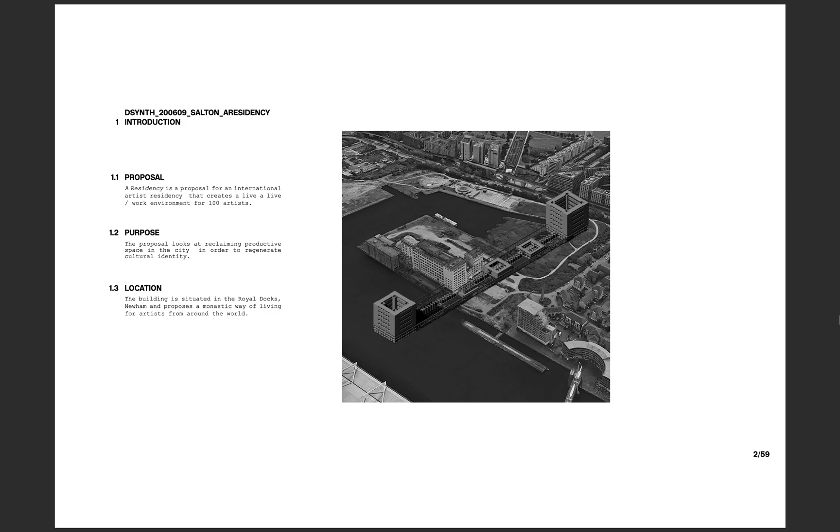This project is titled A Residency, and it proposes a new international artist residency to counteract the failing cultural climate amidst the placeless residential developments of East London. In the post-Brexit landscape, the UK government is prioritising STEM immigrant professionals, but where does this leave the cultural sector? This proposal creates an architectural framework for the relatively chaotic processes of artists.

Principally, the architecture takes the standpoint that mess does not equal mess. Messy lives do not equal messy architecture. Instead, architecture acts as a framework for living, liberating the user from the pragmatic to focus on the experiential. The architecture is very still, so that the life can be really alive. There is no confusion between the two.

The simple architecture does not dictate how people use the space. It eliminates the confusion and highlights the importance of life's mess rather than architectural mess. However chaotic and complex the lives within, the residency transforms the whole into a permanently ordered chaos. On arrival, the new resident is handed a schedule. The schedule is designed to allow the user to make a clear distinction between live and work.

The scheme sits in the borough of Newham, one of the most culturally deprived boroughs in London. Silvertown Quays is witnessing one of many large-scale placeless developments in London. The site of the residency sits on the edge of the Royal Docks and is occupied by several relics of the industrial past of Silvertown.

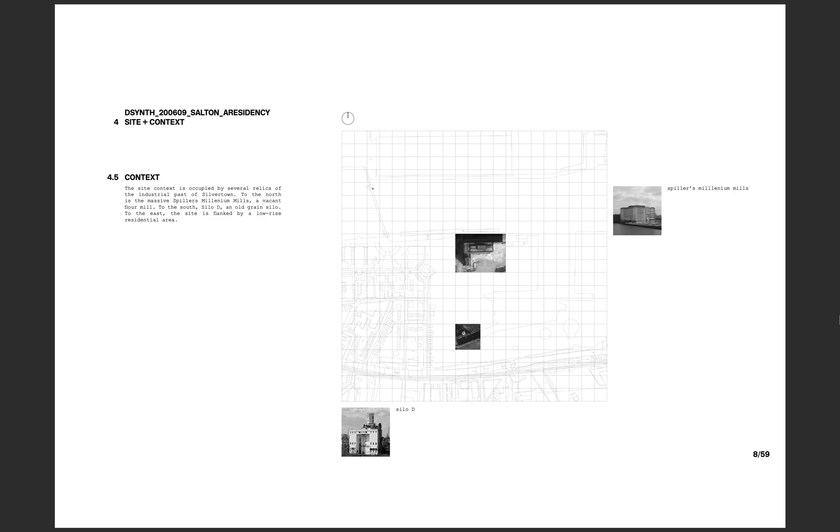To the north, the massive Spillers Millennium Mills, a vacant flour mill. To the south, Silo D, an old grain silo. The creative programme of the residency echoes the productive history of the site as one of London's largest flour mills.

As well as responding to the built environment of the site, the programme utilises the unique geology of the Docklands, sitting on a large vein of London clay, clay being a plentiful and sustainable medium for the production of paint, sculpting and other artist media. The process of making natural clay media is simple and does not require specialist machinery.

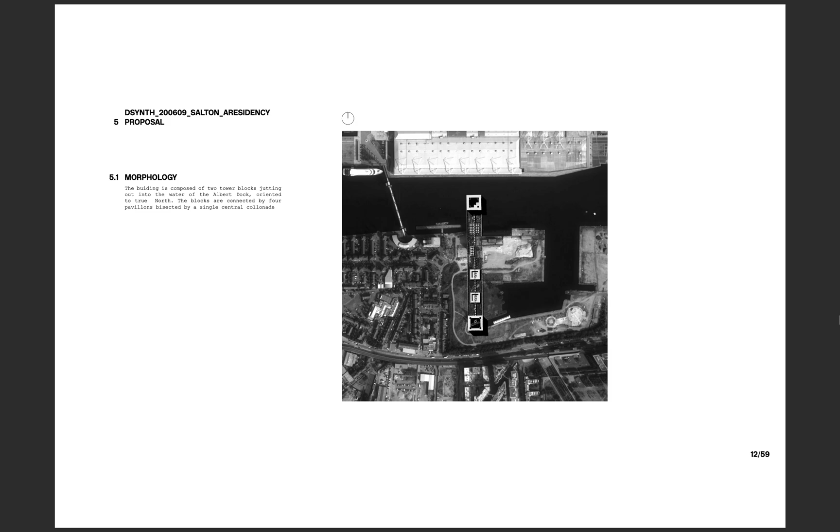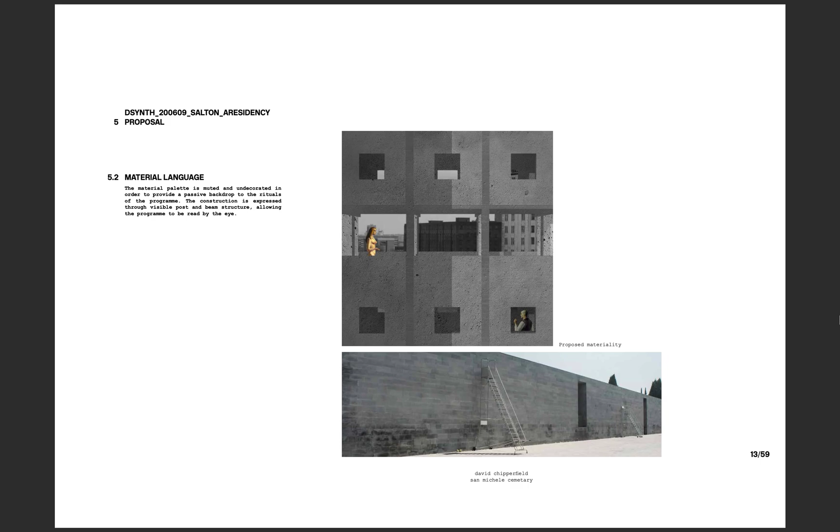The residency provides the infrastructure for the artist to create and experiment with this vernacular media, a site-specific factory for art. The building is representative of its programme, defining live, work, the intermediate processes between the two, all sewed together by the public realm. The discipline of the architectural framework is matched by the material language. Dark raw concrete facades are bound by a visible post and beam structure, forming a rhythmic division of spaces. The segmented programme within is expressed by the tectonics externally.

The logic of the master plan is summarised into three distinct layers. 2 blocks at either end of the rectangular plan represent the separation of live and work. 4 pavilions connected by a central pier expose the programme, from digging clay from the ground to processing the media ahead of painting, sculpting or potting.

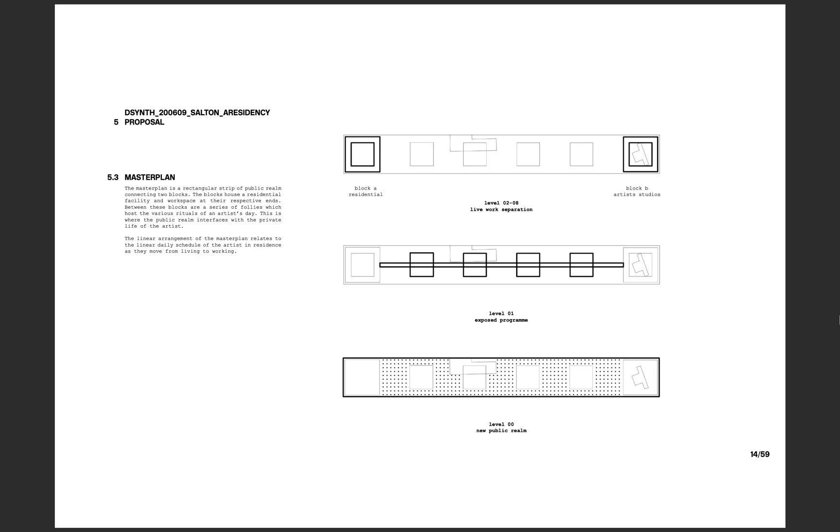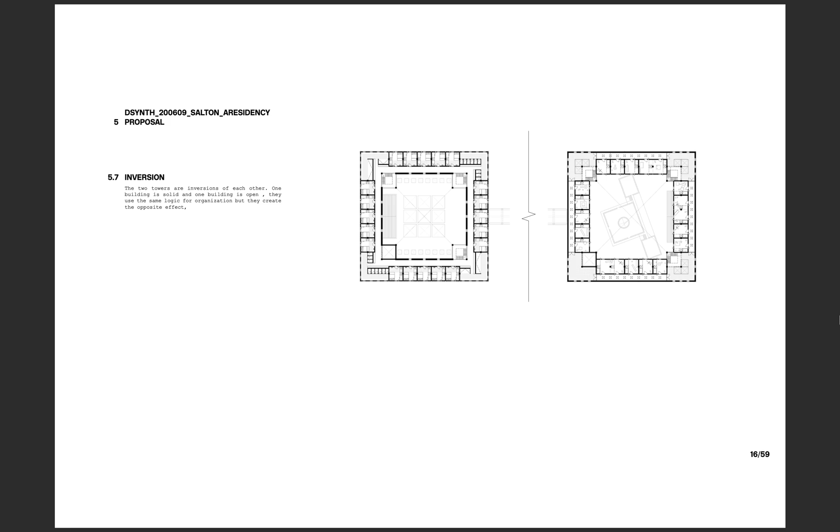The public realm wraps the proposal at ground level. The residential block looks outwards over the Royal Docks. The studio block looks inwards over the existing ruins of Silo D. The 2 towers are inversions of each other. One building is solid, one building is open. They use the same logic for organisation, but they create the opposite effect. The pavilions between the 2 blocks are less prescriptive and encourage moments of chaos and inspiration.

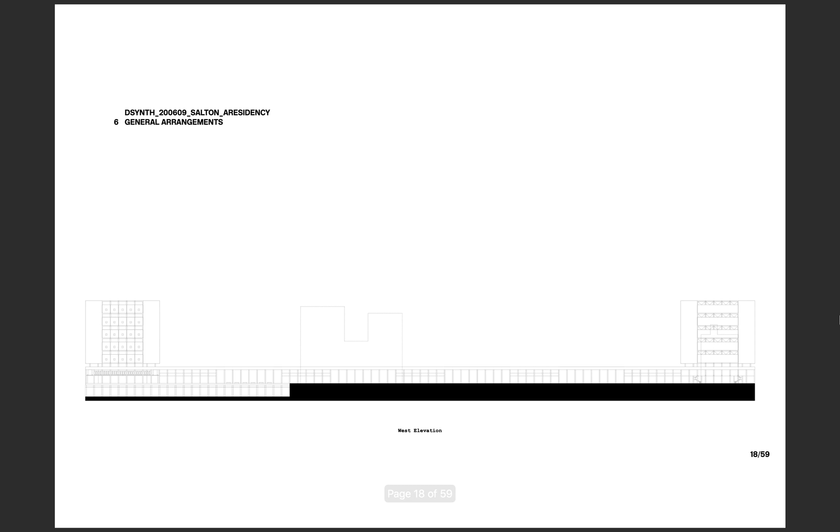A framework for living. The artist rises in a square room. The walls are 4.5 metres of equal length. The walls are smooth dark concrete. A single window, half a metre wide, brings morning light into the room. The artist opens a heavy steel door and proceeds to the showers.

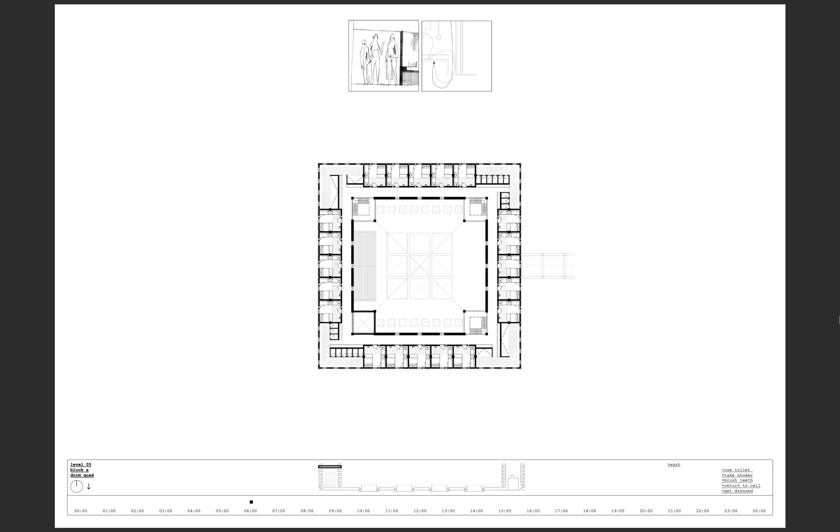The artist descends an external stair, encased in fine mesh. The artist walks out into an atrium. The ceilings are 5 metres high, supported by thick concrete columns. 9 skylights, 5 metres squared, bring a flat light onto 3 banqueting tables. The artist joins the queue for breakfast.

The artist crosses the atrium and ascends a grand stair, 20 metres wide. Arriving in a narrow corridor, a blank wall faces a colonnade, changing booths, lit from above by a small square opening. The artist steps down onto the external colonnade.

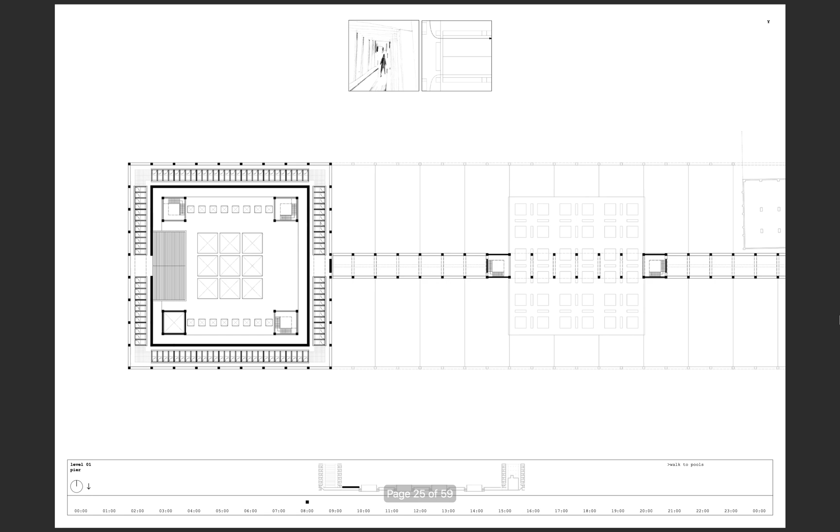Square columns, spaced every 2.5 metres, frame the Docklands waters. Onto a narrow pier, a 100mm gap marks the threshold. The artist crosses a grid of openings, revealing the water of the dock below. The artist resurfaces and continues along the pier.

The artist descends into a small clay quarry. The artist gathers their material. The artist resurfaces and continues along the pier.

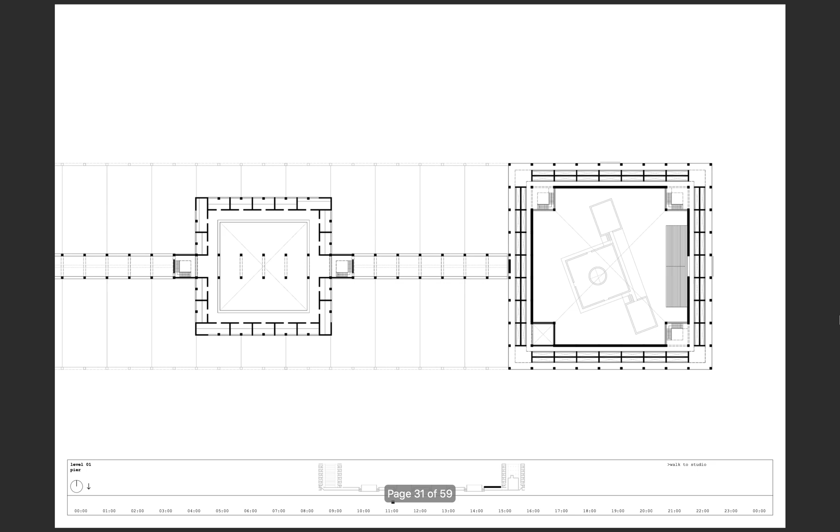The artist descends into a second folly. A small chamber contains a series of top-lit booths. The artist prepares their material. The artist surfaces again, makes their way to the studios, crossing the second threshold.

Moving through the equipment store, the colonnade spacing opens up, arriving at the foot of the old ruin of Silo D. The artist ascends the stair to the studios, moving to a square room flanked with kilns and workbenches. The artist walks down a narrow corridor and turns into the studio.

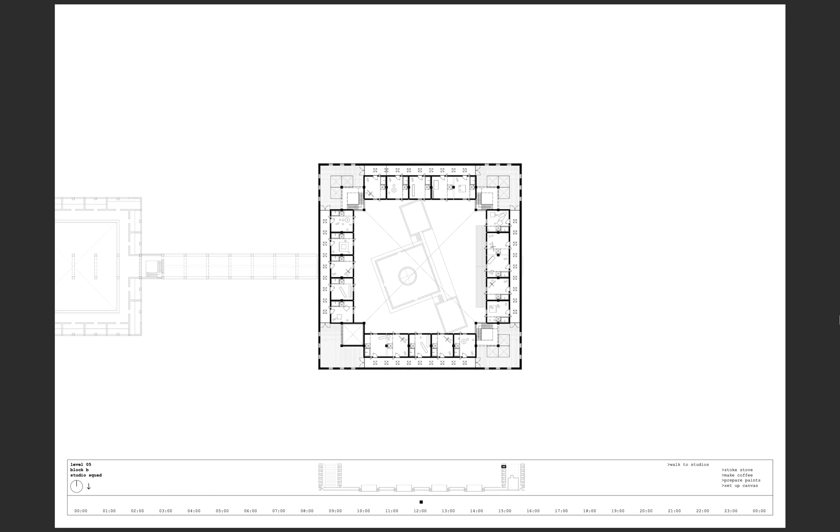The studio is a square room of equal length. The walls are 4.5 meters wide, the ceiling double height, a large window, a high level lights the room. The artist begins to paint.

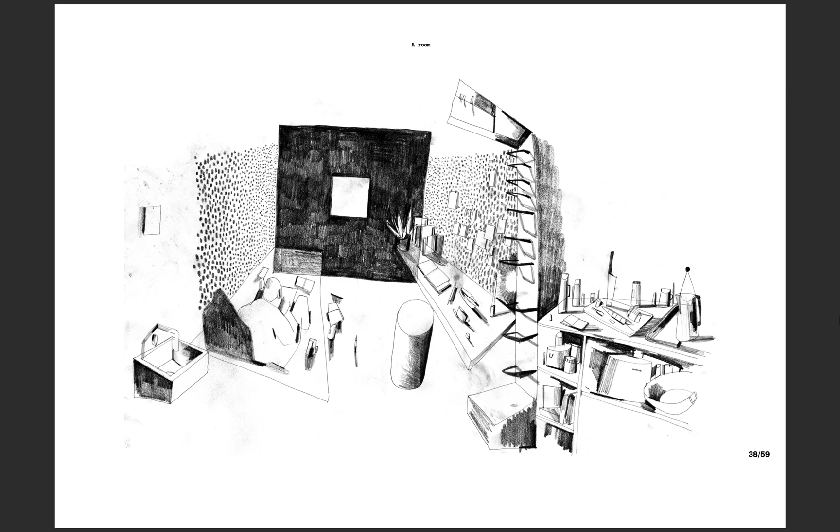Living in the framework. Focused daylight casts my room in deep shadow. My coffee is brewing on the stove. I'm walking to the shower.

Rhythmically, windows reveal matching openings across the courtyard with suggestions of like-minded routines within. Collectively we gather. Chaos fills the breakfast canteen. Segmented by strict columns and highlighted from above, conversations inspire ahead of the day.

The building guides me, and an intimate space protects me while I change into my work clothes. Moving away from my living space, a colonnade leads me. I stand on the terrace, overlooking the clay pit.

I dig for my clay. The ground below is stained with dust as I mix the clay, and the pigments fall between the gridded floor. Wrapped by concrete and the square windows of our studios, I enter the workspace and collect my things.

Once in my studio, the ruin of Silo D is my muse. This warped perception becomes my inspiration. The studio acting as a framework for my mess.

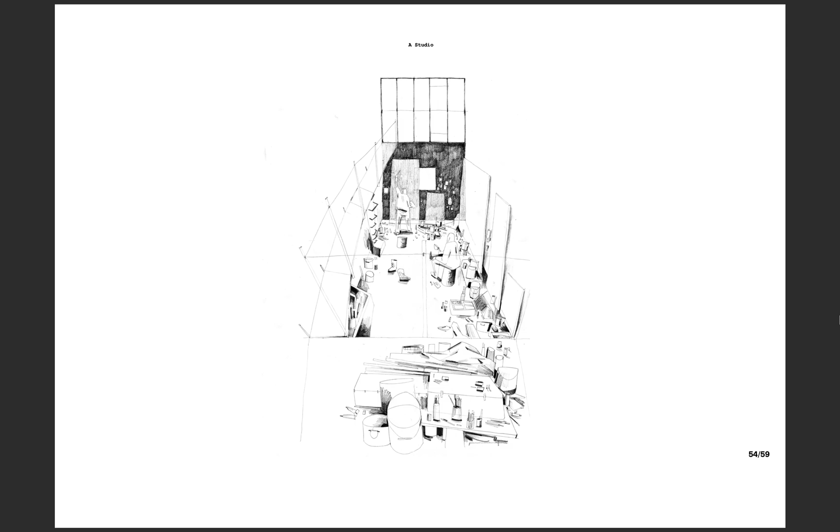A residency, a framework for a day of an artist.